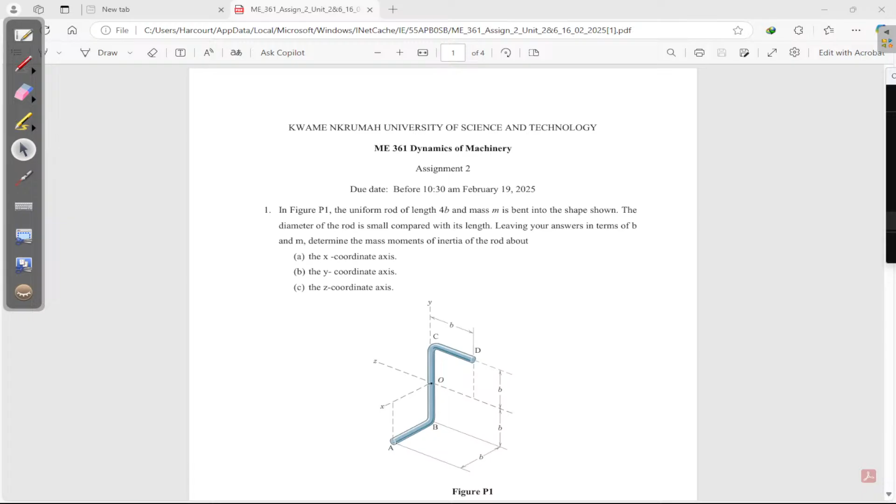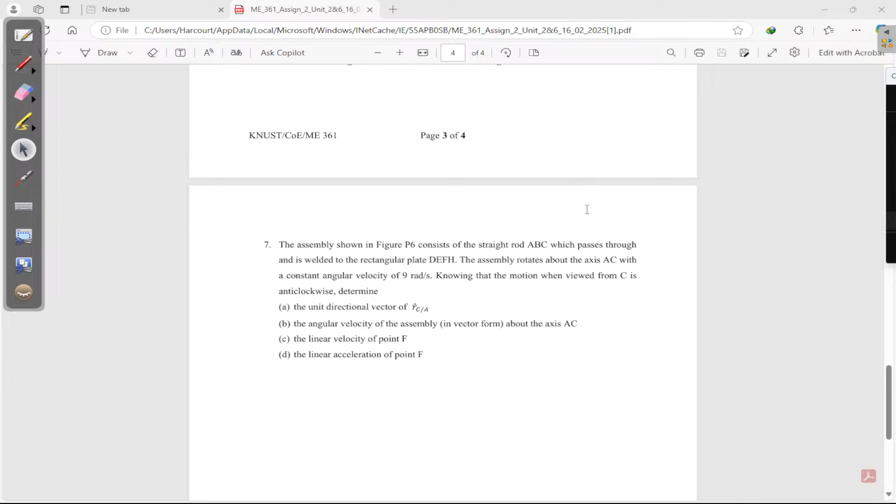All right, these are the questions that I have. It involves units 1, 2, 3, and unit 6 as well. So the thing is, Dr. Ambafu usually will give you some general questions, and then he will bring similar ones, but some different questions, right? Similar question, that's the best way. We'll change some things so that if you understand the concept, you can be able to apply it there. So that's what's going to happen.

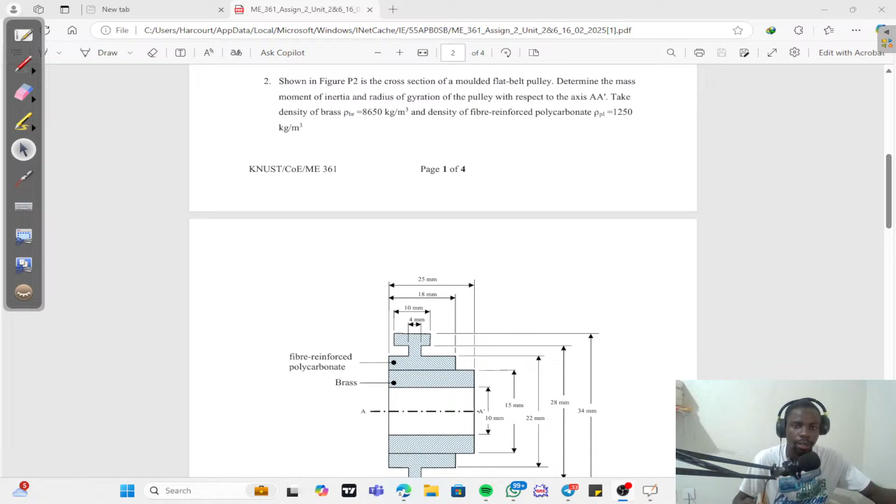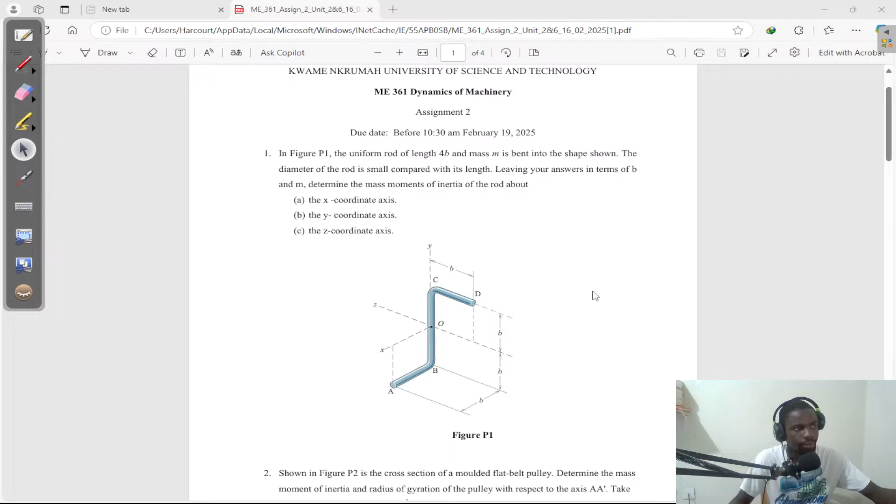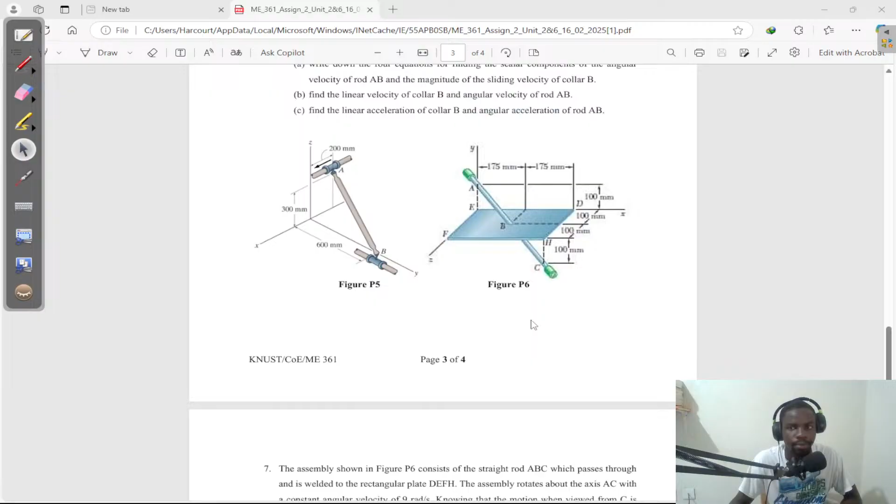Okay, so we are going to start with the unit 2 questions. These two, I solved them yesterday, so I won't go back to them. So let's start with the first one.

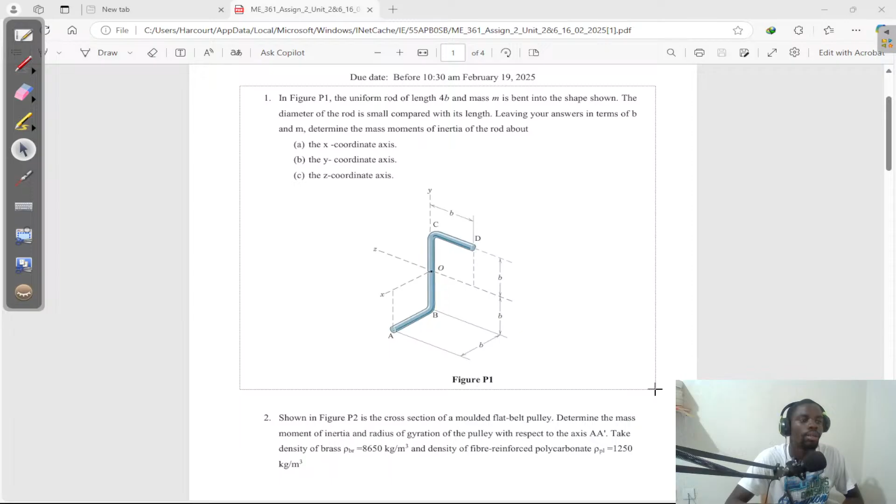Okay, so this is a moment of inertia question. Right now, the question is asking us to find the mass moment of inertia of the rod about the x-axis, about the y-axis, about the z-axis. Okay, there is a similar question that is a bent rod, but different form like this.

And that one came in the mid-sem and end of sem, I mean the last years, your seniors. I don't know what could probably happen, right? But it's going to be similar concepts. So you try as much as possible to understand this. If you have a question, you ask. If you finish and you have the time, I will try and bring that up and we see how that goes.

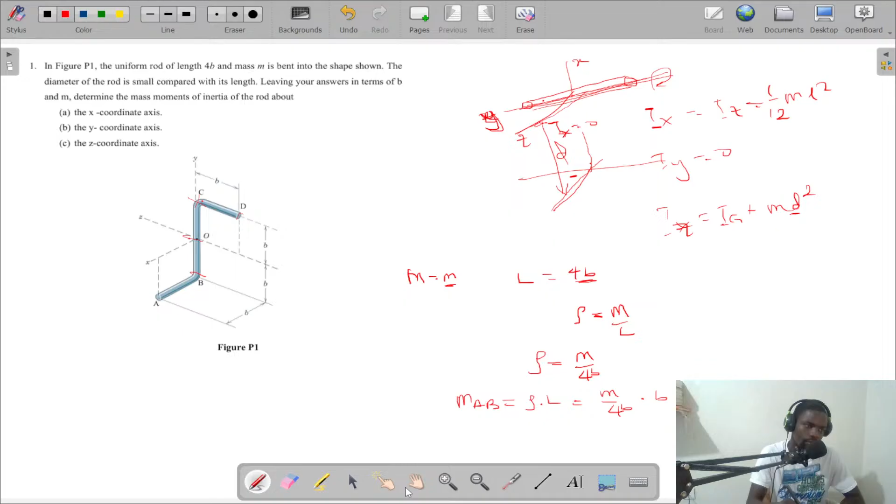Realize that they all have length b, b, b, so all of them are going to have mass m over 4. So you know the mass for all of them. In exams, it will be more appropriate to say that M_AB equals M_BO equals M_OC equals M_CD equals M over 4, so that if they're going to mark for finding the masses of the individual parts, you can be given credit for that.

The next step is to go ahead and find our moment of inertia about the x-axis. What I'm going to do is pick the parts one by one and locate their centers, and see how we can relate their centers to the reference points given. Let me drag that down.

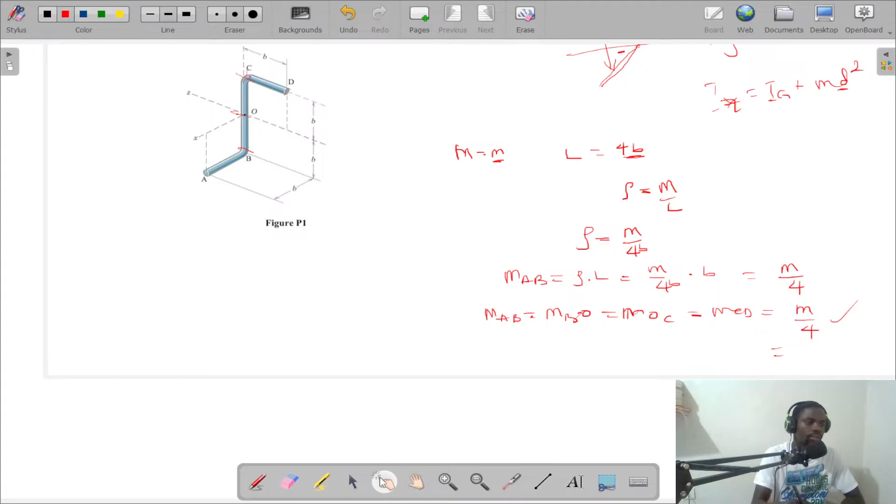Okay, so for IXX, as stated earlier, if I pick the block AB, its center is somewhere here, so its X will be along the longitudinal, its Y will be along this direction, the Z will be along this direction, and then the Y will be here.

So if I want IXX, it will be equal to the IX about the center of AB plus the mass AB times the distance between this X and this X. So the moment of inertia about the X of the rod, we are going to find all of them and add. So IXX will be equal to IXX AB plus IXX BO plus IXX OC plus IXX CD.

So IXX AB is what I was doing earlier: moment of inertia about its center plus MD squared. Now you can see clearly that the X passes through the longitudinal part of the AB, so its IG is going to be 0. The mass is m over 4. The distance between this X and this, we start from here coming down, so that would be negative B, so you have negative B all squared, giving MB squared over 4.

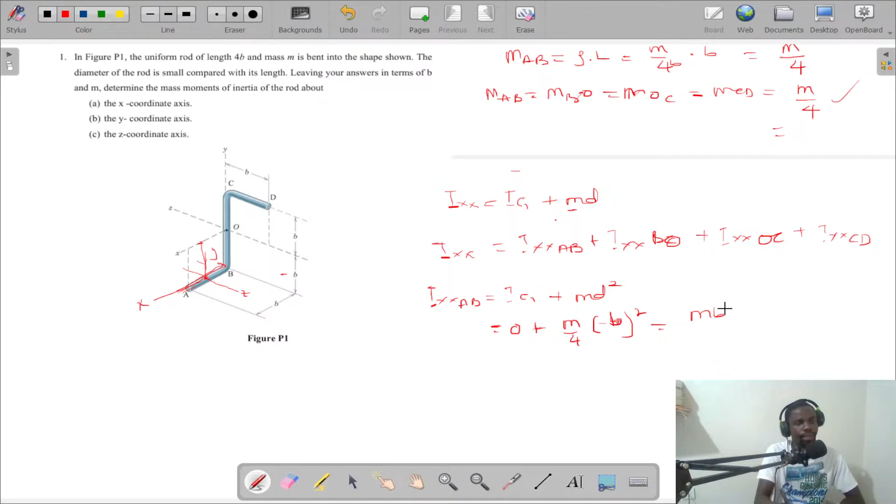Okay, then we find IXX BO. IXX BO will be IG plus MD squared. I have to indicate that this is for BO. So if we pick BO, let me clean the other one. Its X will be here, its Y will be here, and its Z will be here.

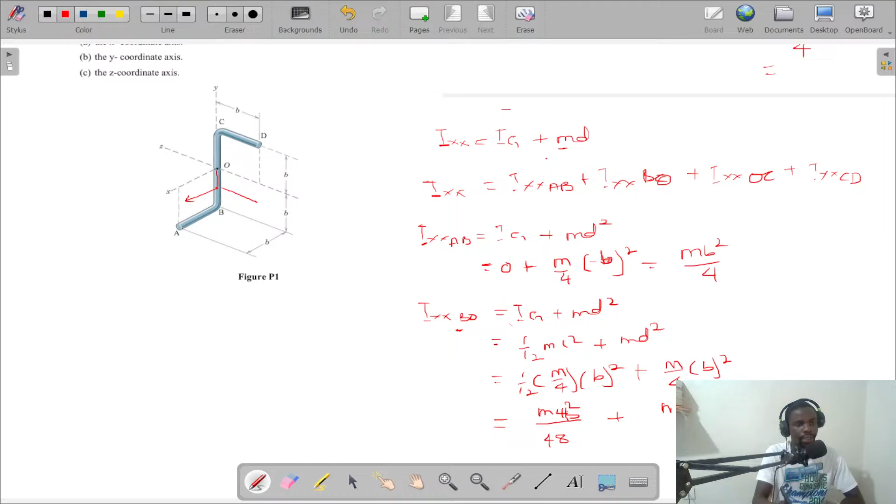So about the center IXX, we are going to have 1 over 12 ML squared plus MD squared. So 1 over 12, the mass is M on 4, the length is B all squared, plus M on 4 times B squared, and this one will be MB squared over 48 plus MB squared over 4, and this simplifies to now be 13 on 48 MB squared.

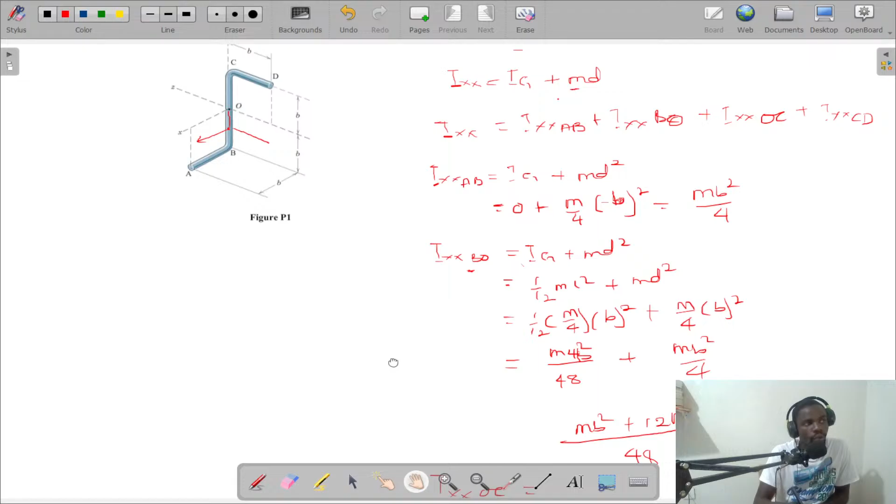Then we go ahead to find IXX OC. IXX OC is the same as IXX BO, with the same x here, and you have 1 over 12 ML squared plus MB squared. So I'm just going to say IXX OC is equal to IXX BO, which is equal to 13 on 48 MB squared.

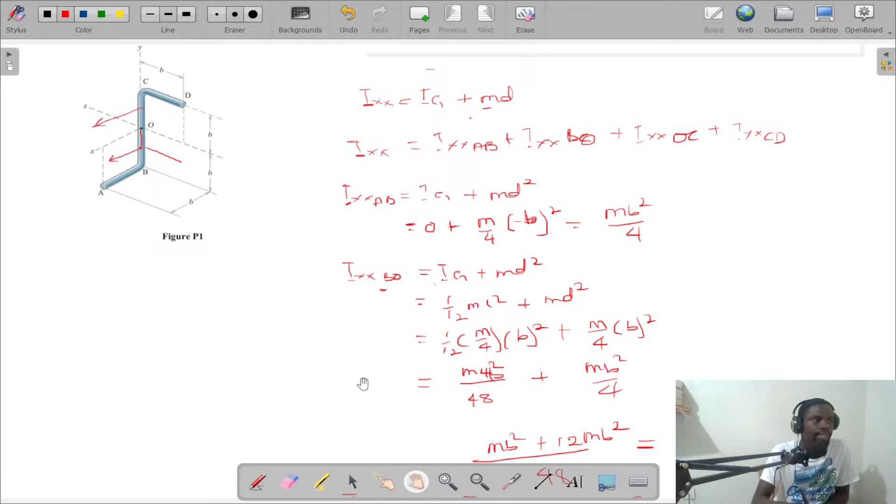Okay, so with that out of the way, we move to IXX CD. So for CD, its center is somewhere here. Now you realize that this x and this x, the distance is slanted, right? So this d squared is equal to from here to here squared plus from here to here squared.

So IXX CD will be equal to 1 over 12 ML squared plus MD squared. The mass is M on 4, the length is B all squared, plus M on 4, and the D is what? B over 2 all squared plus B squared. So B over 2 all squared plus B squared will be equal to the D squared, the distance between this X and this X. If we simplify, we have MB squared.

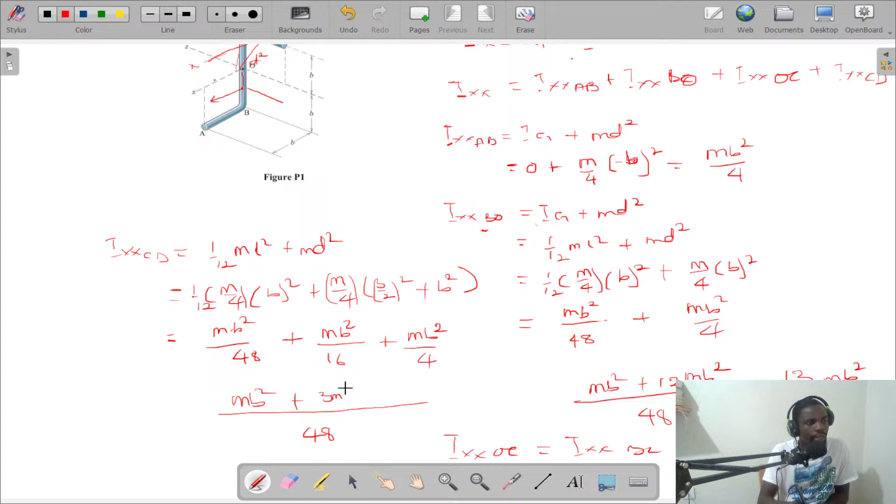I made a mistake here, so it's supposed to be B. So MB squared over 48, plus MB squared over 16, plus MB squared over 4. So I have, over 48, MB squared plus 3MB squared plus 12MB squared, and this will give us 16MB squared all over 48, and that will be MB squared on 3.

So your IXX will be equal to the first one, MB squared on 4, plus 2 times 13 over 48 MB squared, plus MB squared on 3. This is 2 because this and this are the same, so I multiply this by 2 to get this.

Then we simplify. So IXX will be MB squared on 4 plus 26 on 48 MB squared, or let me use 16 MB squared on 48. So IXX will be, the LCM is 48 now: we have 12 MB squared plus 26 MB squared plus 16 MB squared, so IXX gives us 54 on 48 MB squared kilogram meter squared. Okay, so that is for the IXX.

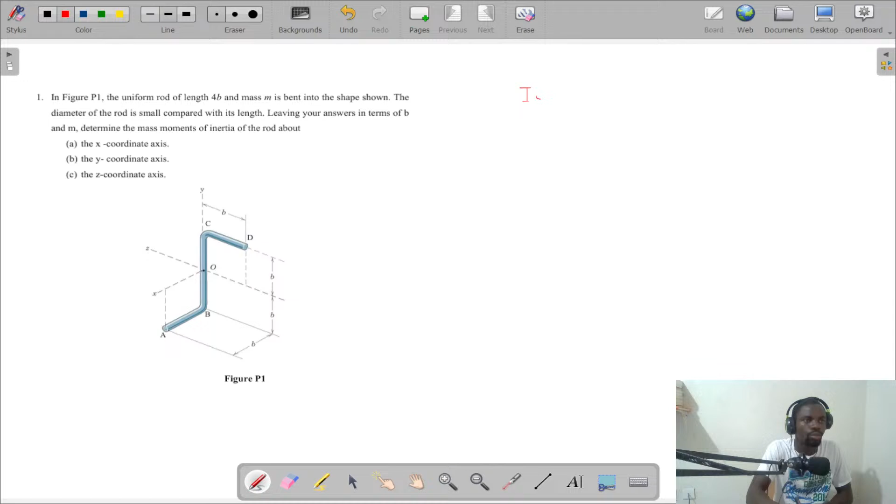Okay, so for IYY, same approach. You pick this. So IYY total will be equal to IYY AB plus IYY BO plus IYY OC plus IYY CD.

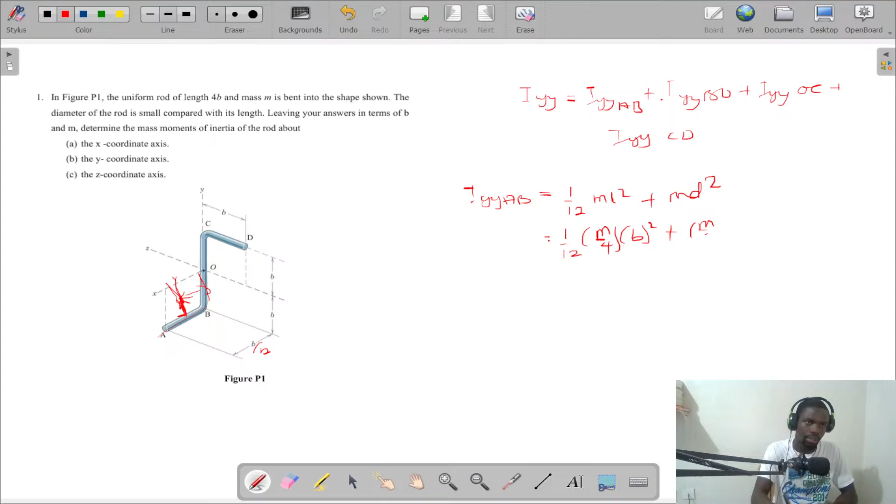Alright, so IYY AB will be equal to, if you pick this center, y is not along the longitudinal now, so I'm going to have 1/12 ml squared plus md squared. The distance between this y and this y is just half b. So we're going to have 1/12, the mass is m on 4, and the length is b all squared, plus m on 4, and the d is b on 2 all squared.

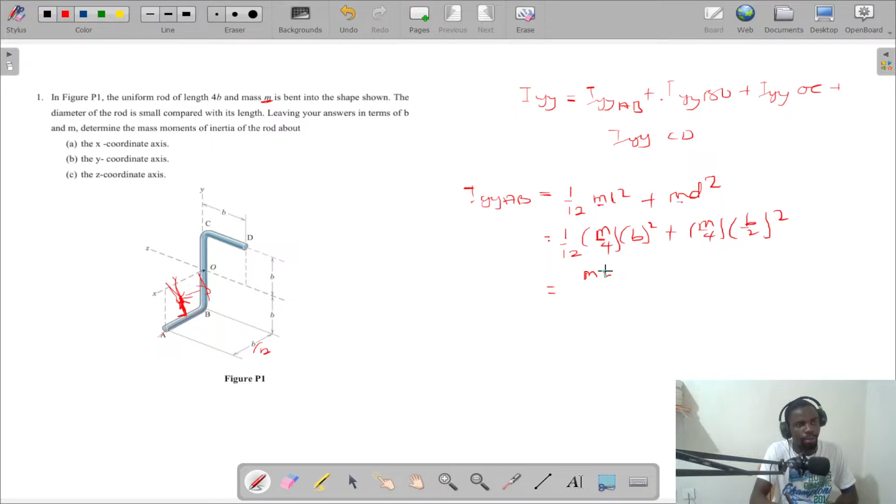Don't forget, this m and this m are not the m's we are using here. We had an m in the question, that is what we are using. This is just the general formula, and this m is the one given in the question. So we are going to have mb squared over 48 plus mb squared over 16, and that will be, so I think 4 over 48 mb squared equals mb squared on 12.

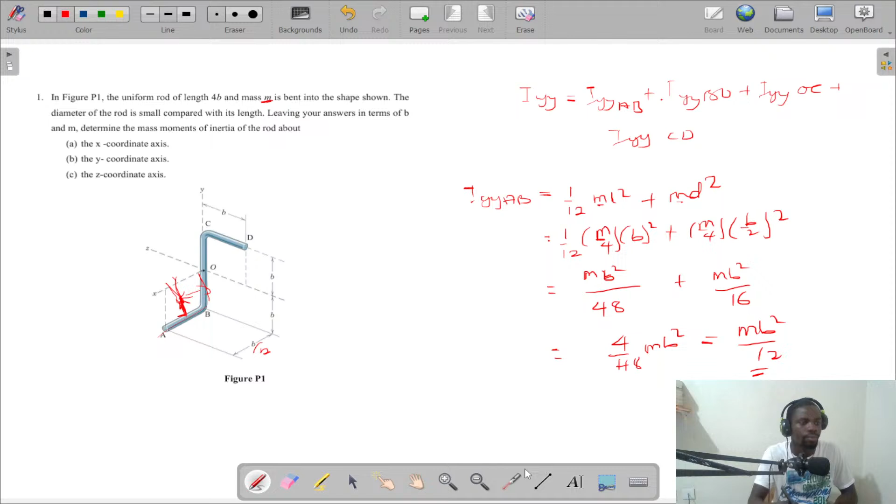Then we do for BO. So IYY BO, the center is here, and this is the y-axis, right? So the y-axis is passing through the length of BO, so this part is going to be 0. So it's going to be 0 plus md squared, and the mass is m on 4. The d, the distance between the y passing through this center and the y-axis, is also 0. So 0 squared, and it's going to be 0.

So IYY BO is equal to IYY OC, equals 0. Of course, the rod is lying on the y-axis, right? And we said the moment of inertia about the axis passing through the longitudinal is 0. So yes, that is not a miracle.

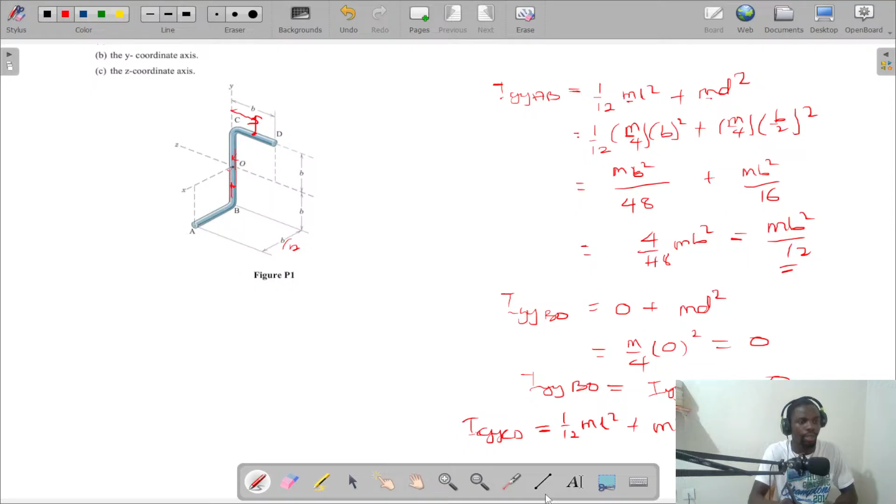So the next is CD. IYY CD. Realize that we have y here, and the distance between this y is from here to here. So I'm going to have 1/12 ml squared plus mb squared. Now m is m on 4, length b squared plus m on 4, and then, sorry, I made it b, it's supposed to be d. The distance between the two y-axes is b on 2 all squared, and this gives us mb squared on 48 plus mb squared on 16, and that will be 4 on 48 mb squared, which is equal to 1 on 12 mb squared.

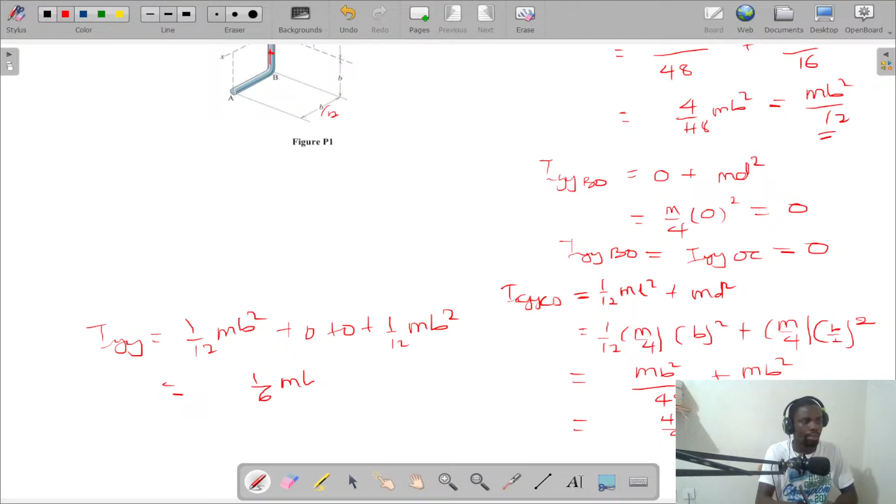So the total IYY will be equal to 1 on 12 mb squared plus 0 plus 0 plus 1 on 12 mb squared, and that will be 1 on 6 mb squared. Okay, and then IZZ, that's the last one. Let's bring this guy down.

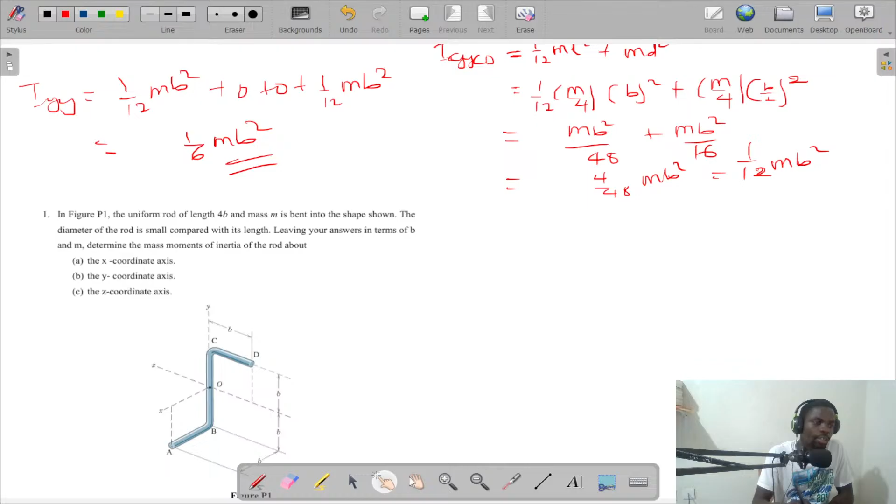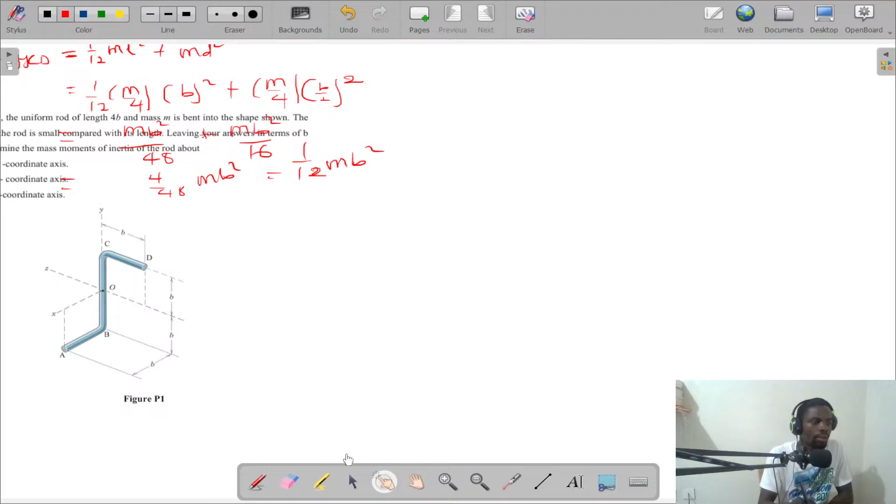Okay, so the next is IZZ. I find the moment of inertia of this rod about the z-axis. So we're going to pick them one by one like we did. So if you pick block AB, the z-axis is here, so the z-axis is also transversal, it's not longitudinal. So IZZ is going to have IZZ AB plus IZZ BO plus IZZ OC plus IZZ CD.

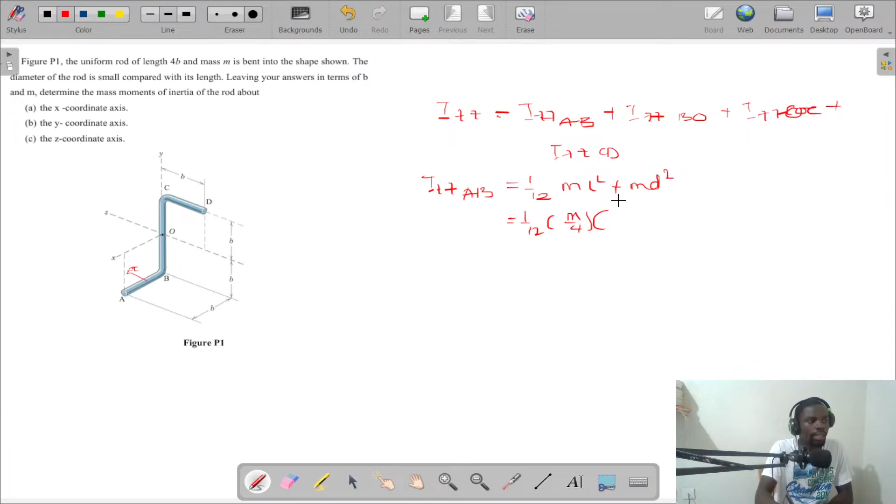So IZZ AB is going to have 1 on 12 ml squared plus md squared. 1 on 12, the mass is m on 4, the length is b squared, plus m on 4, and the d, which is the distance between the z here and the z here. Realize that that's going to be a slant line. So d squared is going to be b on 2 here and b here. So I'm going to have b on 2 all squared plus b squared.

So that will be mb squared on 48 plus mb squared on 16 plus mb squared on 4. So we have the LCM 48, so mb squared here plus 3mb squared plus 12mb squared, and that will be 16... 1 on 3 mb squared.

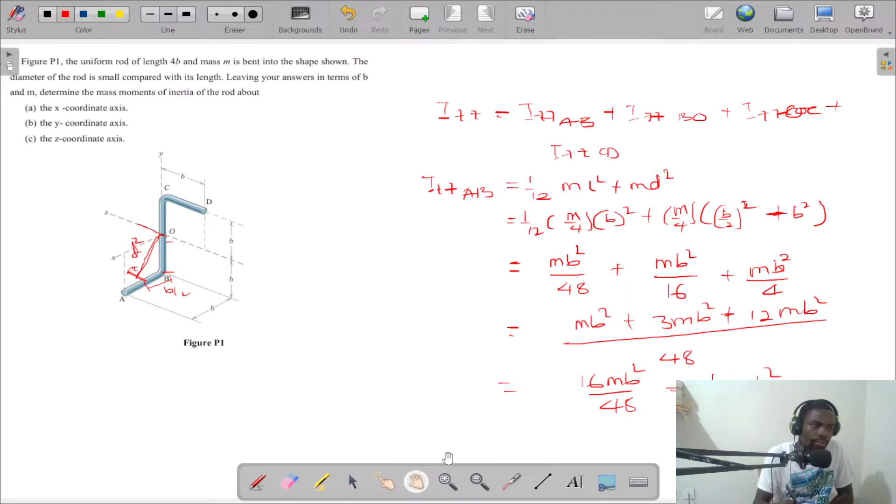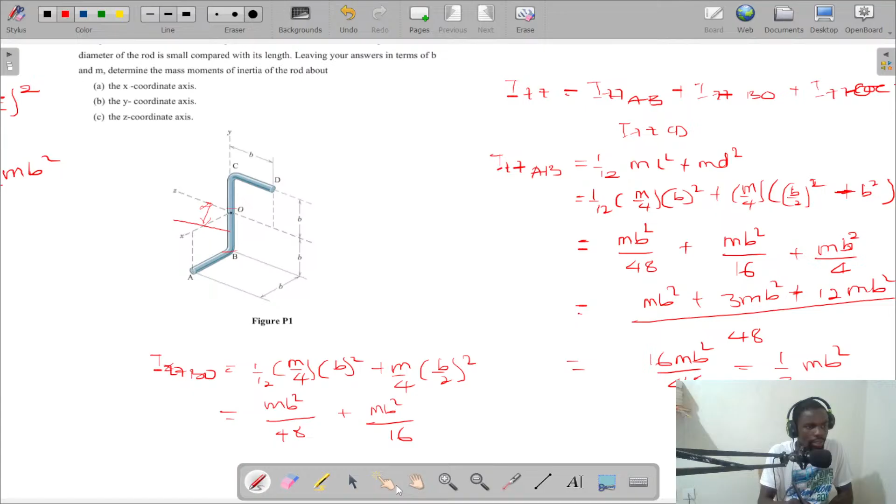Then we do for BO. So for BO, which is from here to here, the z will be here. So the distance between this, you just have b. So IZZ BO will be 1 on 12, m on 4, b squared, plus md squared, but the d this time is b on 2, so m on 4 times b on 2 all squared, and that gives us mb squared on 48 plus mb squared on 16, and that will be, so 48, 3, 4 mb squared on 48, giving you mb squared on 12.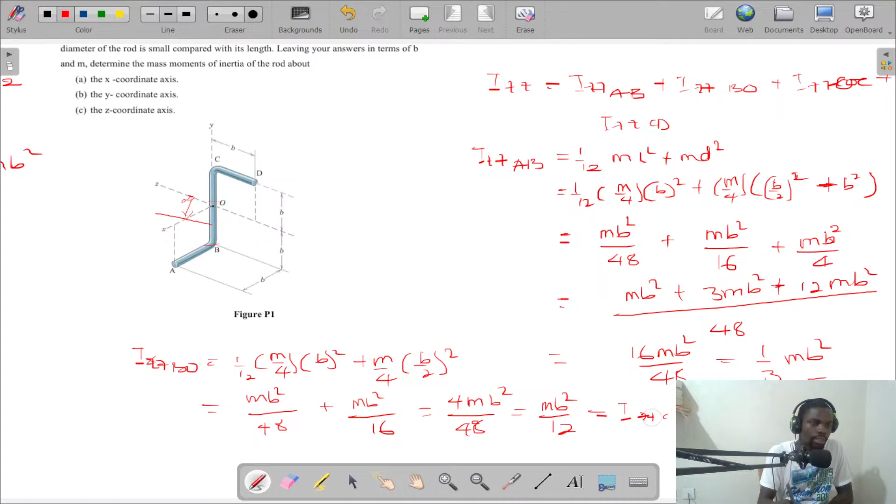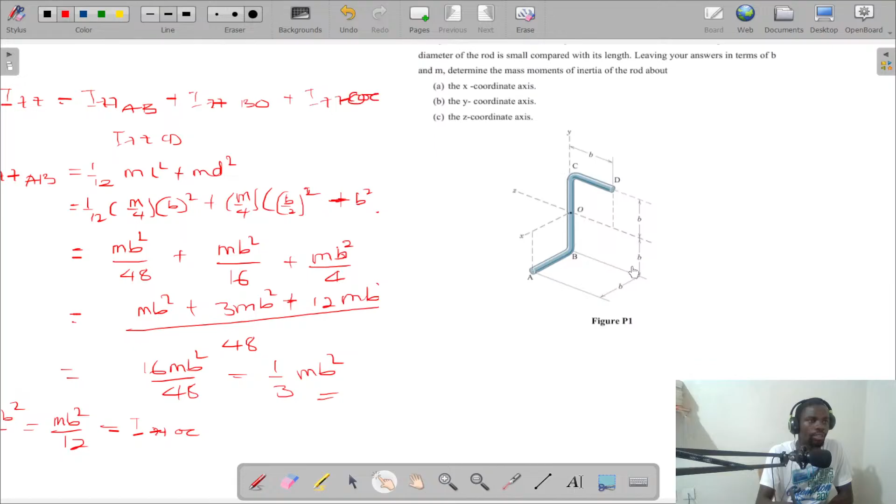Okay, so last one, which is IZZ CD. So for the CD, the z-axis is along the longitudinal section. So IZZ CD, you have I_0 plus md squared. Now I_0 plus the mass is m on 4, and the distance d between this z and this z is here, which is b. So IZZ CD will be mb squared on 4.

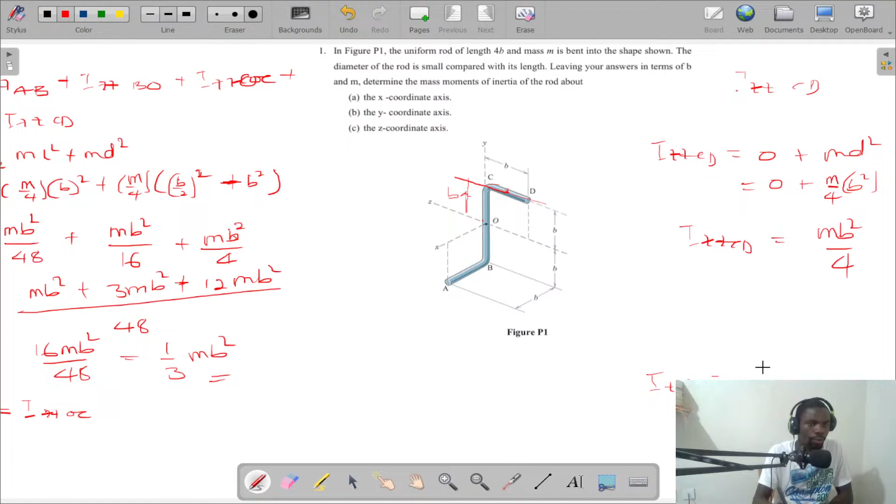So our total IZZ is going to have 1/3 mb squared plus mb squared on 4, mb squared on 12, times 2, plus mb squared on 4. This is 2 because from here to here it is the same as from here to here. So we found this, and then multiply by 2.

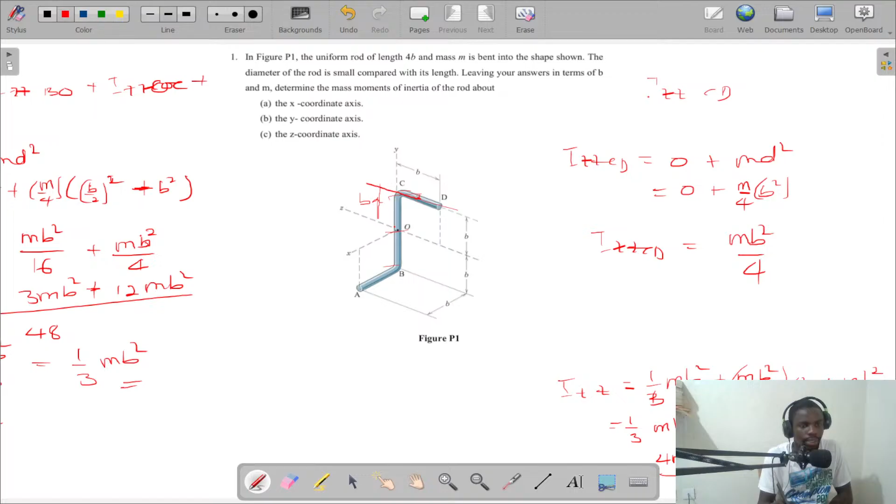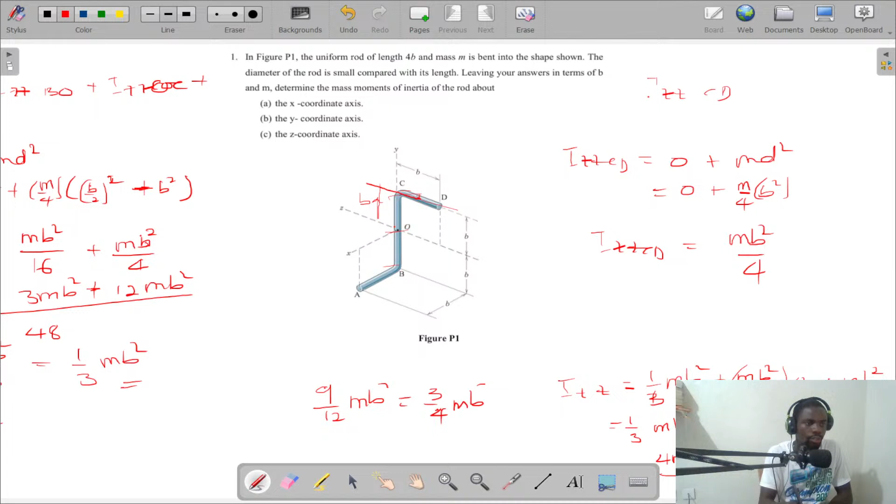So that gives us 1 over 3 mb squared plus mb squared over 6 plus mb squared over 4. So with 12 as denominator, we have 4 mb squared plus 2 mb squared plus 3 mb squared. If you add all of them, that gives us 9. So we're going to have 9 on 12 mb squared, which is 3 on 4 mb squared, and that will be IZZ.

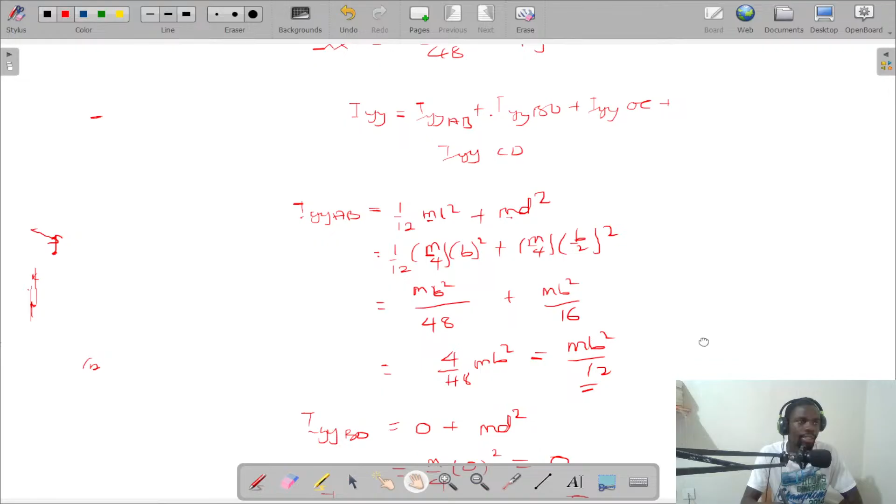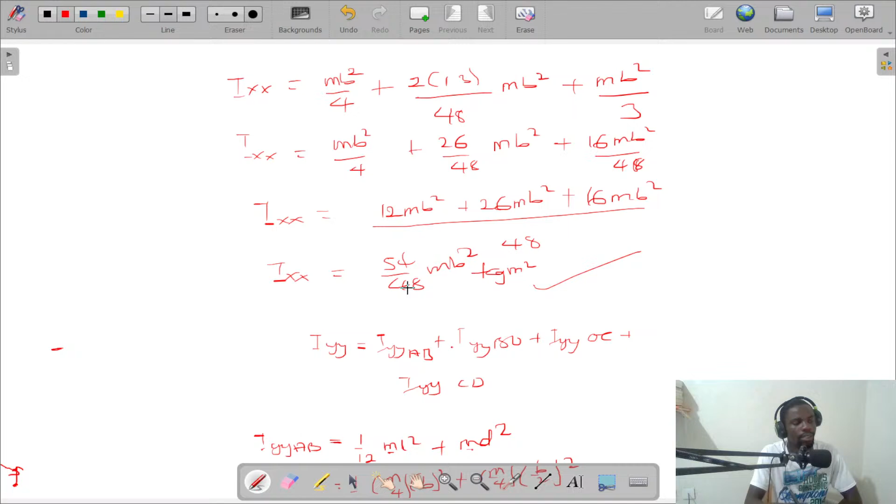Okay, so our total moment of inertia about the z-axis will be this. Total moment of inertia about the y-axis will be this, and about the x-axis will be this. We can further break this one down to something easier or simpler. Okay, so that is that for question 1.

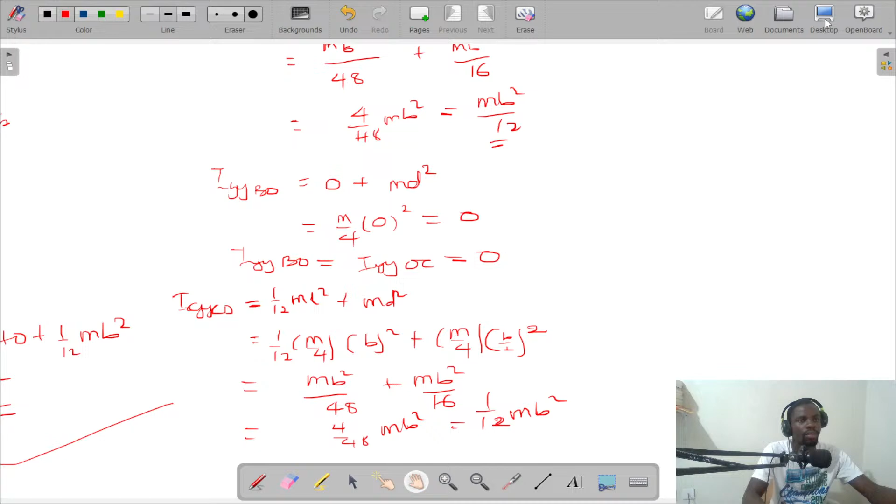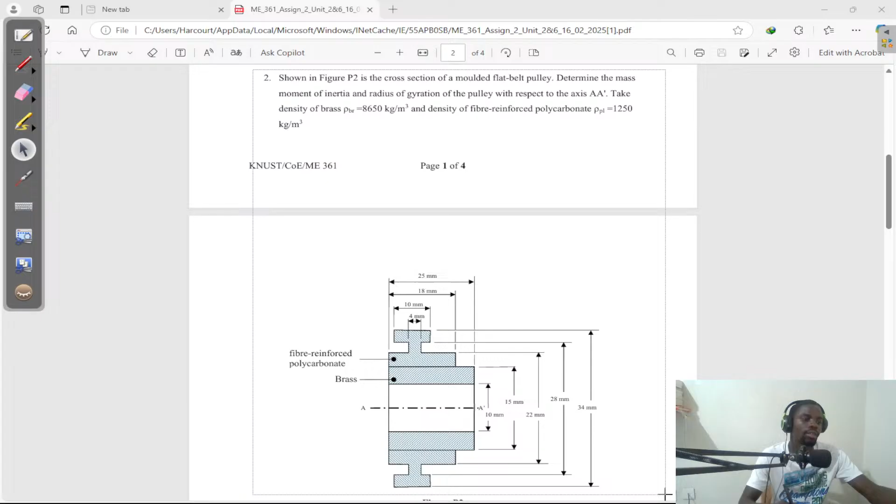All right. So the next is this problem. Okay, so this question I'm going to make it very simple.

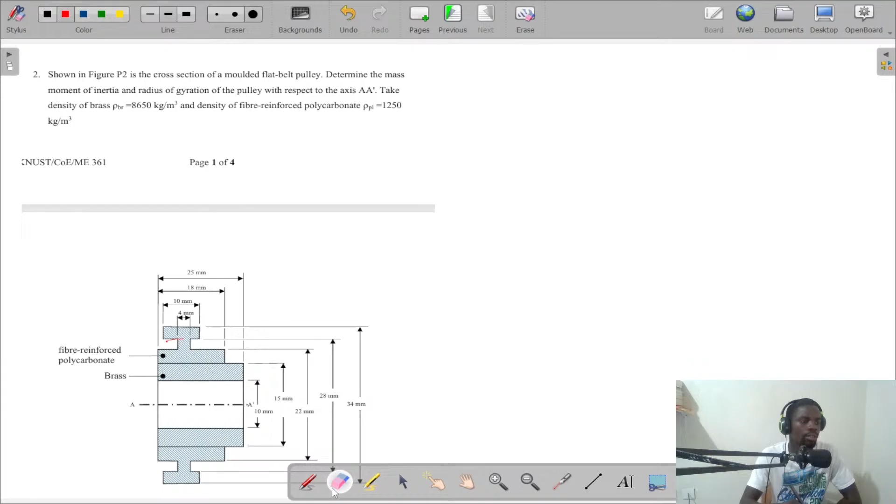So the moment of inertia of any of them, each of them is a cylinder, right? Each of them is a hollow cylinder that has been sectioned. So the moment of inertia for each of them is going to be rho pi h on 2, big R power 4 minus small r power 4, and the mass of each is going to be rho pi h, r squared minus...

The question they're asking us is to find what's the radius of gyration, and radius of gyration is k. So k is equal to square root of total I all over total m. So that's basically it. So if I pick this, the first one, the one with height 10 millimeters, so this one, right? So let me label them 1, 2, 3, and 4.

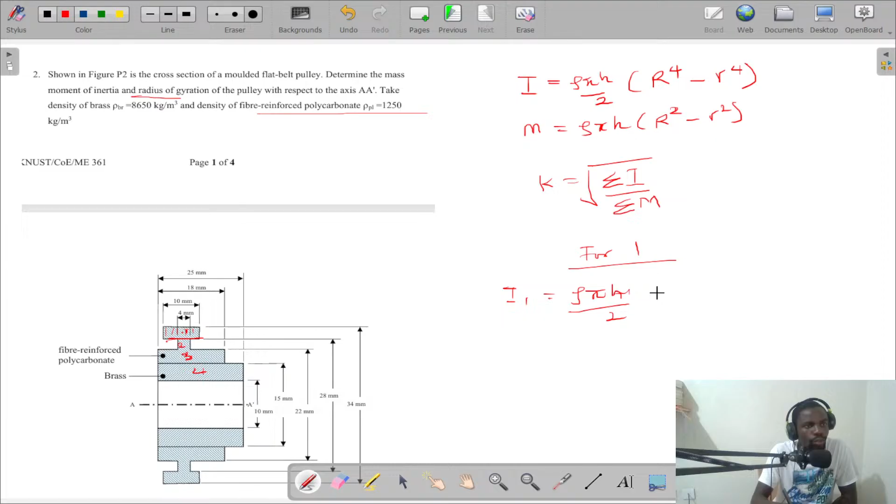So for one, it is a fiber reinforced polycarbonate, and this is the density. So for I for one is going to be rho pi h1 all on 2, big R for 1 power 4 minus small r for 1 power 4. So rho obviously is 1250.

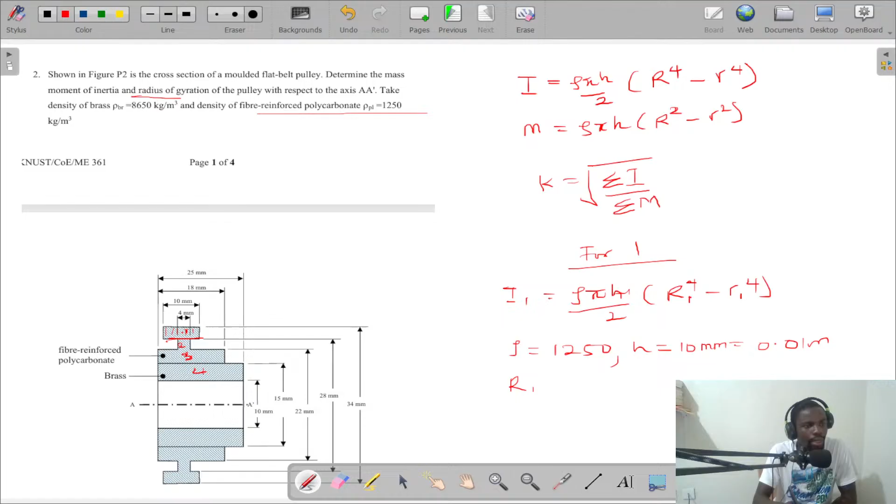The h is 10 millimeters, which is equal to 0.01 meters. Big R for 1 is going to be, so the diameter for the big R is the distance from here to here. That's the diameter. So if you divide by 2, that gives us the radius. 34 on 2 is 17. So we have 17 mm, and that is equal to 0.017, 2, 3, so...

0.017 meters. Small r for 1 will be, so the small r will be from here to here. That's the diameter for the inner circle. So if we divide by 2, we get 14, and that will be 0.014. So I for 1 will be...

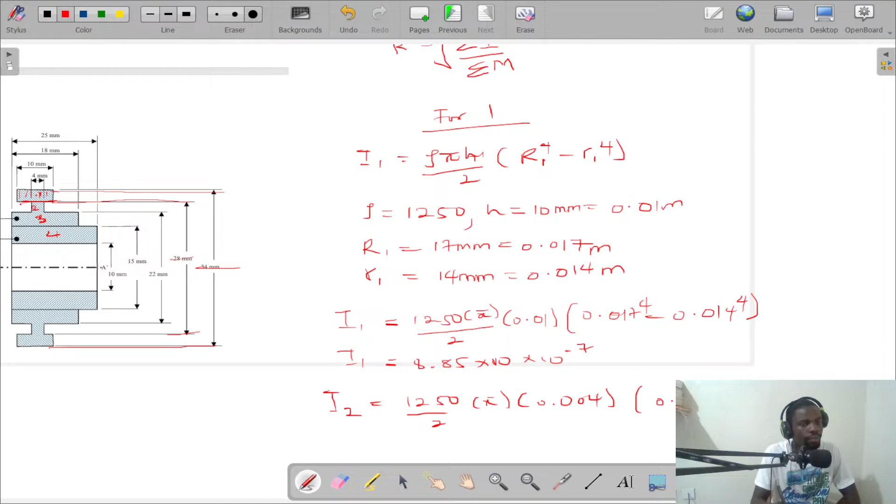So I for 2 I'm going to have, and the mass, the density is the same, so 1250 on 2 pi multiplying the height now is 0.004, and then the bigger radius we have 0.014 power 4 minus 0.0075 power 4. This is 15. Oh, that is 22 rather, so that would be 0.011.

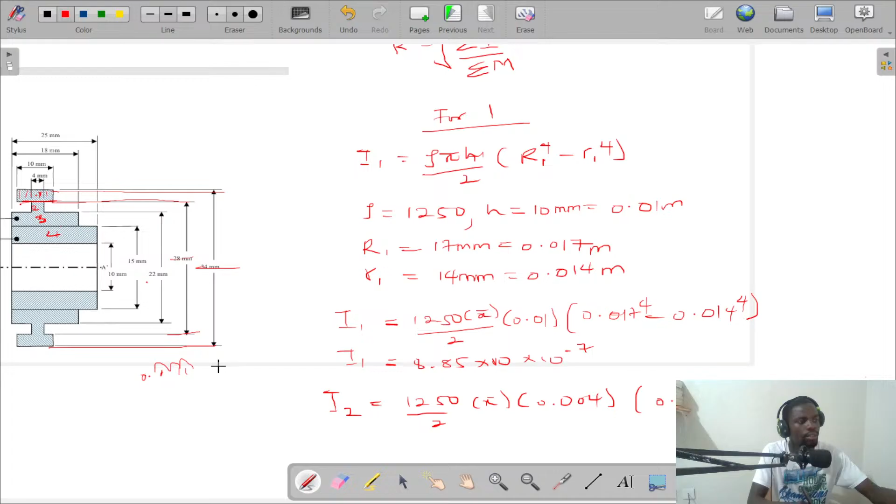So 22 on 2 is 11. 2, 3, 0, 1, 1 power 4, and I2 will be so 1250 on 2, multiplying pi, multiplying 0.004, multiplying 0.014 power 4, minus 0.011 power 4.

Okay, so we have 1, 2, 3, 4, 5, 6, so 1.867 times 10 power negative 7, and then I3.

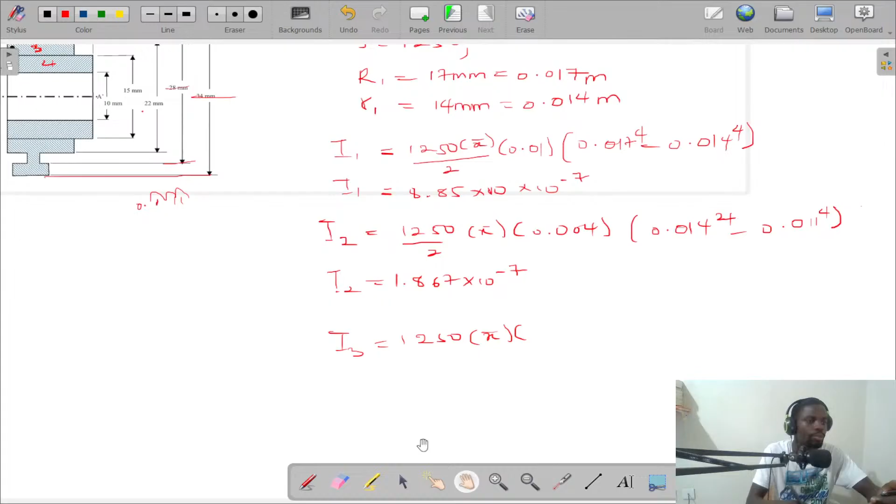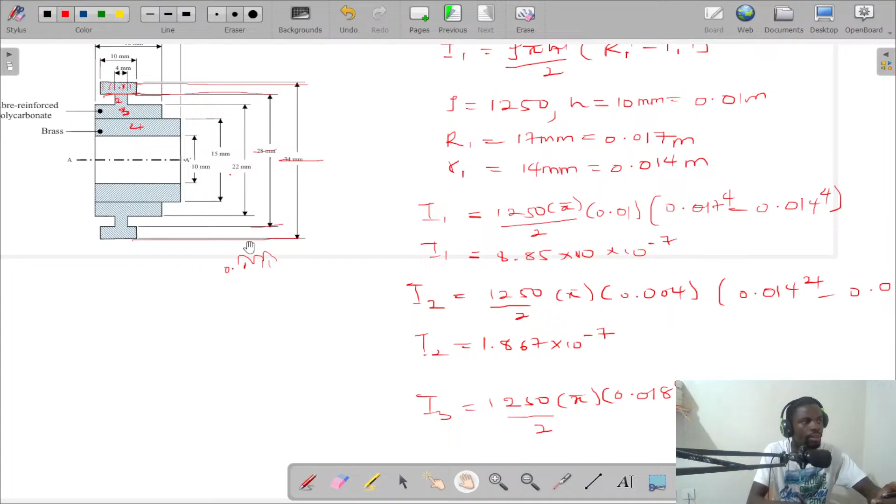For I3 we have same 1250 times pi times the height, now is from here to here, which is 0.018, multiplying, okay, all on 2 here, and then the big R is going to be 22, the smaller is 15, so we have 22 on 2 is 11, 0.011 power 4 minus 0.0075 power 4.

So I3 becomes 0.00018, 0.11, 7, 5. Okay, so we have 4.05 times 10 power minus 7 kilogram meter square. Then we do for I4.

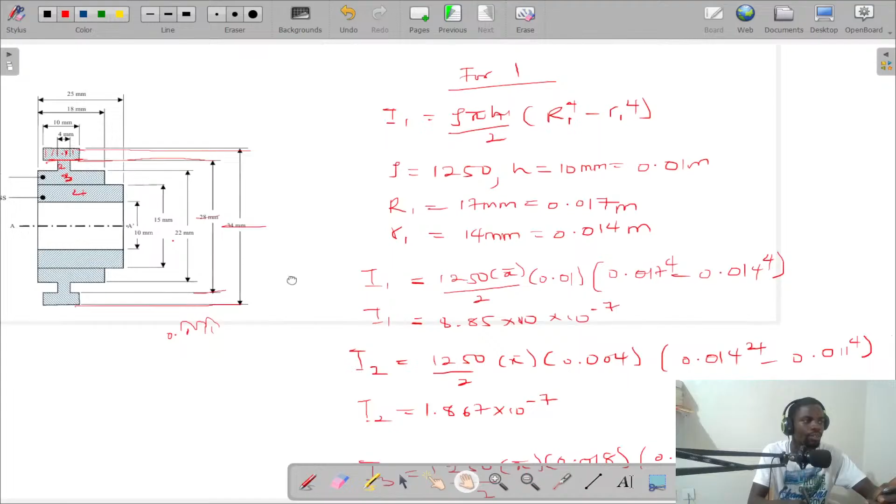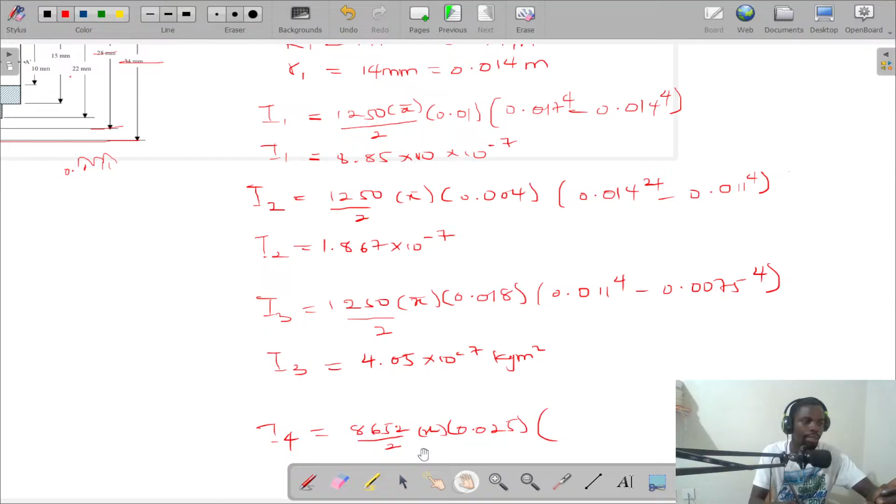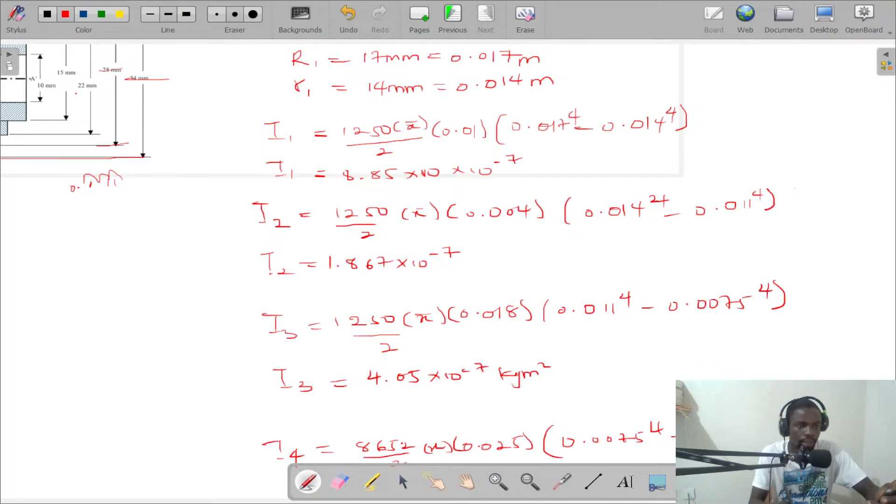This time the density is what for brass, and the brass density is 8650. All right, so I'm going to have 8650 on 2 multiplying pi multiplying the h is 25, so that will be 0.025, multiplying big R for 4. The big R is 15, which is 0.0075, and the small is 10, which is 0.005. So we have 0.0075 power 4 minus 0.005 power 4, and this gives us, so we have

865, this is 52, 8650. 8650 times pi on 2 times 0.025 multiplying 0.0075 minus 0.005, and that gives us 8.62 times 10 power minus 7.

Okay, so the total I is going to be 8.62 plus 4.05 plus 1.8 plus 8.85, all times 10 power minus 7. So we have 8.62 plus 4.05 plus 1.8 plus 8.85. So total I is 2.32 times 10 power minus 6 kilogram meter square.

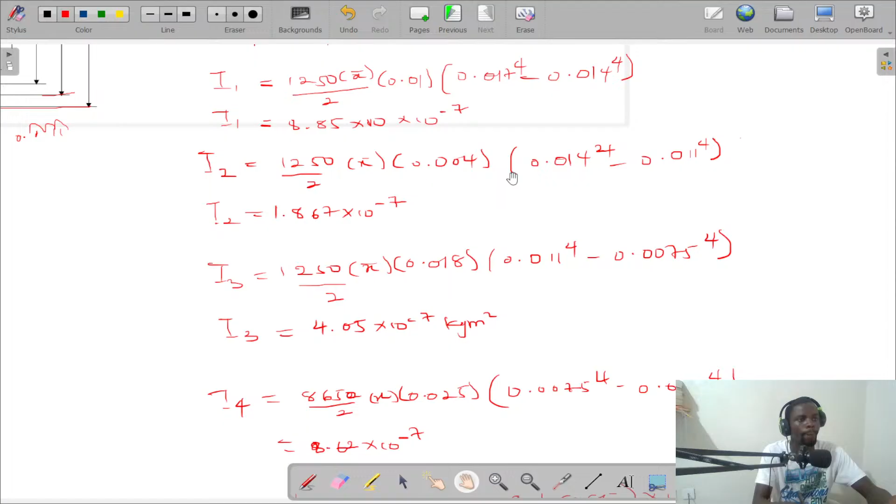M2, we have this, the H 0.004, we have 0.014, 0.011, so 0.004, 0.014 squared minus 0.011 squared, and that gives us that will be 1.178 times 10 power negative 3

kilogram. M3, same, 1250 times pi, and the height 0.018, and then we have 0.011 squared minus 0.0075 squared, and that will be 0. So we have 4.576 times 10 power negative 3 kilogram.

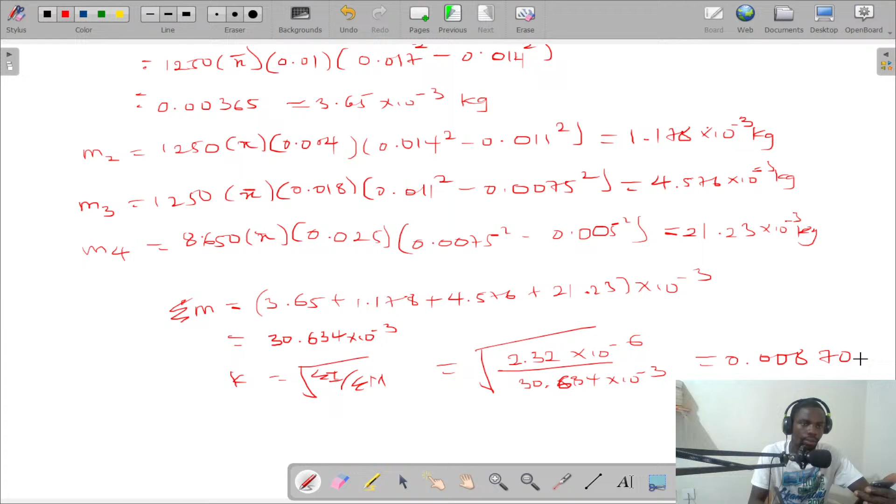So your K will be square root of total I all over total mass, which is square root of our total I. We had 2.32 times 10 power negative 6, all over 30.634 times 10 power negative 3, and this will be equal to the square root of 2.32 times 10 power negative 6 all on 30.634 times 10 power negative 3, and that gives us 0.00870 meters, or 8.70

meters, or maybe 8.70, sorry, 8.70 millimeters. All right, so that is that for this question.

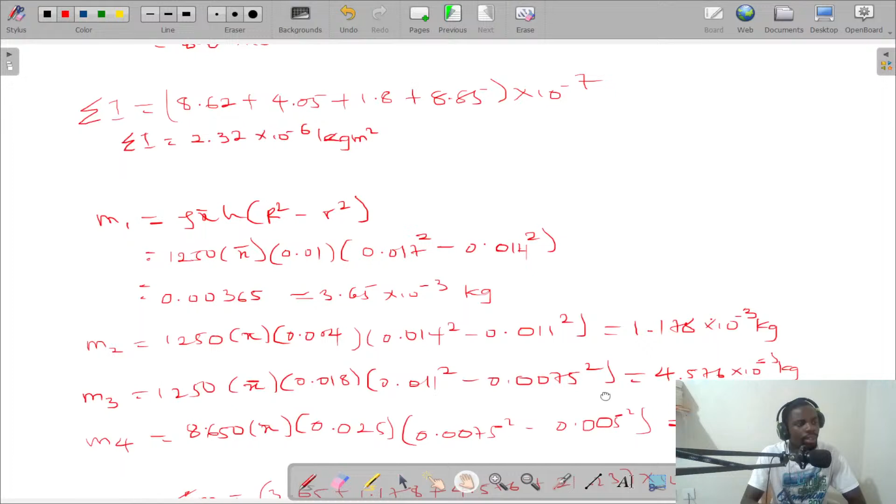That is that for this. Is there any question, or we should move on?